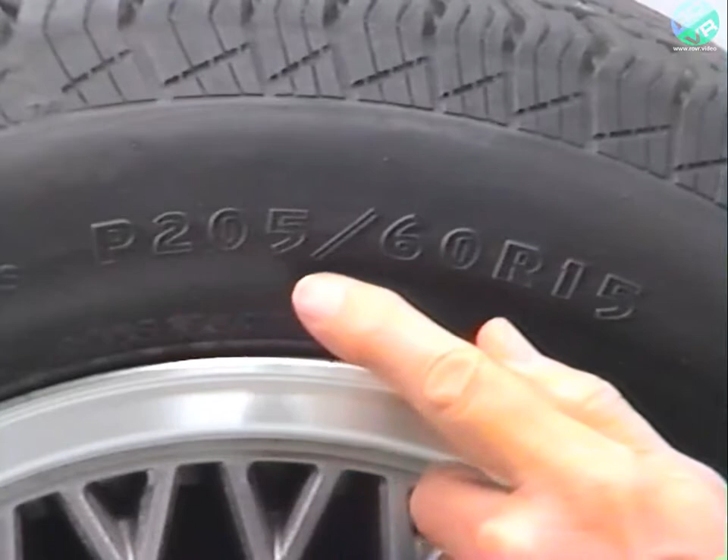In this program, we're going to cover the basic information you'll need to resolve customer complaints in these areas, including tire design, ratings, and required maintenance, and tire and wheel problem diagnosis and correction. Then we'll review the different types of suspension systems and the basic alignment angles and their effect on handling and steering. Finally, we'll examine procedures you need to be aware of when performing an alignment.

Let's begin with a look at some tire basics.

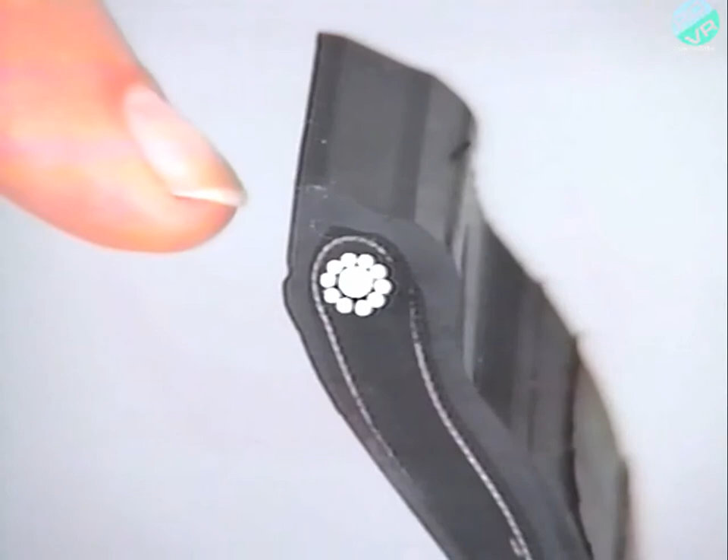Although their appearance and size may vary considerably from vehicle to vehicle, most tires are similar in the way they're put together. A bundle of wires called a bead provides strength where the tire meets the wheel. The body plies, consisting of tire cords and rubber, curve around one bead, across the tire, and around the other bead. Because this is a radial tire, the body plies are perpendicular to the direction of travel.

Between the body plies and tire tread are stabilizing belts, again consisting of tire cords and rubber. The belts help support the tire and keep the tread open for greater traction. The tire sidewalls and tire tread are made of a mixture of natural rubber and synthetic rubber. The tire parts are bonded to one another using heat and pressure in a process called vulcanizing.

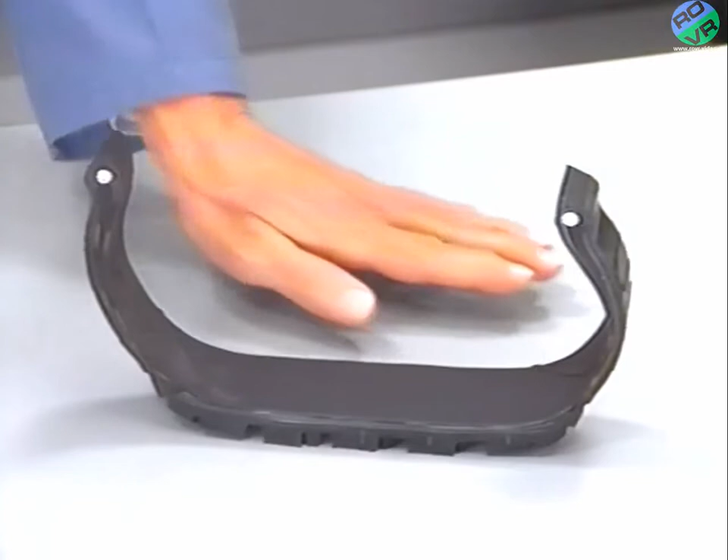Because of their superior performance, radial tires are used exclusively as original equipment on passenger vehicles. As mentioned earlier, on a radial tire, body plies run at a right angle to the direction of travel. This design results in less internal stress during turning and lower friction when rolling. This is why radial tires provide better fuel economy and greater steering sensitivity.

You can find out a lot more than the tire design by learning to read the sidewall of a tire. Let's start with the tire size. Most of the tires you'll encounter will have a metric size description. The metric classification is replacing the alphanumeric designation in which a letter provided load information.

Let's examine exactly what the metric size rating stands for on a P205/60R15 tire. The P at the beginning of the designation specifies the application, passenger car. The number following the application is the width of the tire cross-section in millimeters when the tire is mounted on a rim. The next number is the aspect ratio, the ratio of the tire's height to its width.

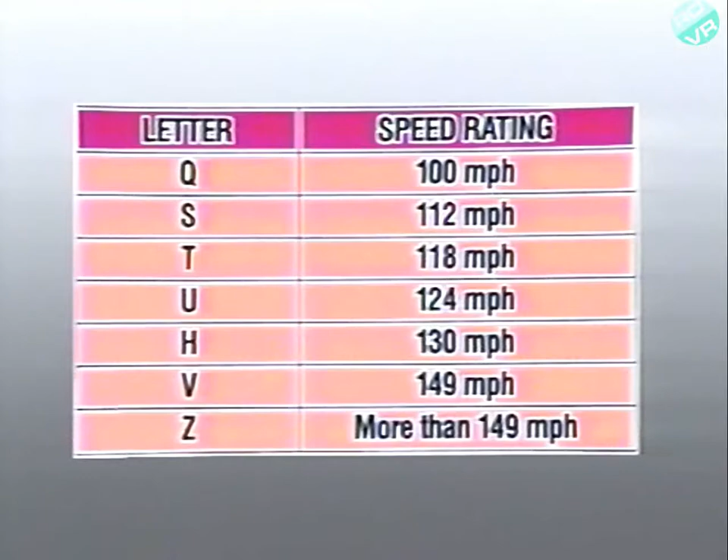An optional letter after the aspect ratio specifies the speed rating of the tire. The R indicates that the tire is a radial, and the 15 indicates the wheel size. An arrow on the sidewall of the tire indicates that the tire is unidirectional, designed to rotate in one direction.

When replacing tires on a vehicle, it's important to use the same size and type of tire as a replacement. Mixing radial and non-radial tires, for example, will affect handling and steering response. Changing tire sizes will alter the relationship between vehicle speed sensor signals and actual vehicle speed.

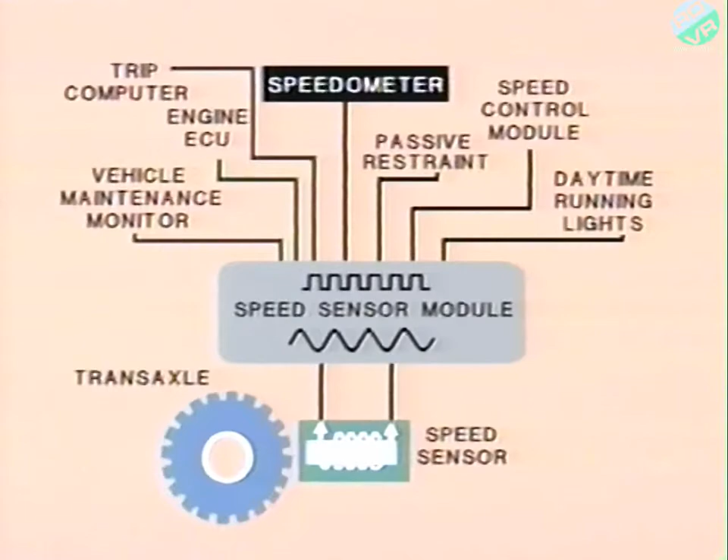Changing tire sizes can also affect the inputs to the controller for anti-lock brake operation. On four-wheel drive vehicles, changing tire sizes can result in damage to driveline components.

On the sidewall of a tire, you'll also find the uniform tire quality ratings for tread life, traction, and heat resistance. These ratings are required by the U.S. government to give consumers a way to compare tires.

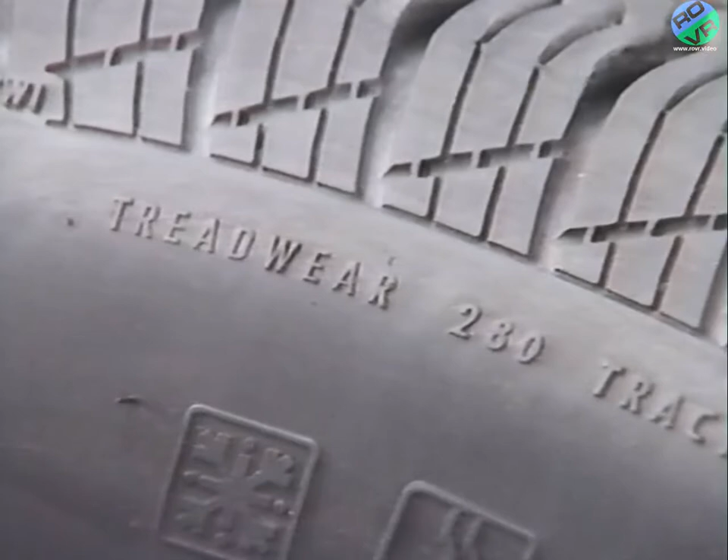Tread life rating is expressed as a percentage, representing the tire's amount of tread life in comparison to a reference value of 100. For example, the tread on a tire rated 280 could be expected to last 2.8 times longer than tread rated 100. The traction and heat resistance ratings are indicated by a letter grade, A, B, or C, with A being the highest.

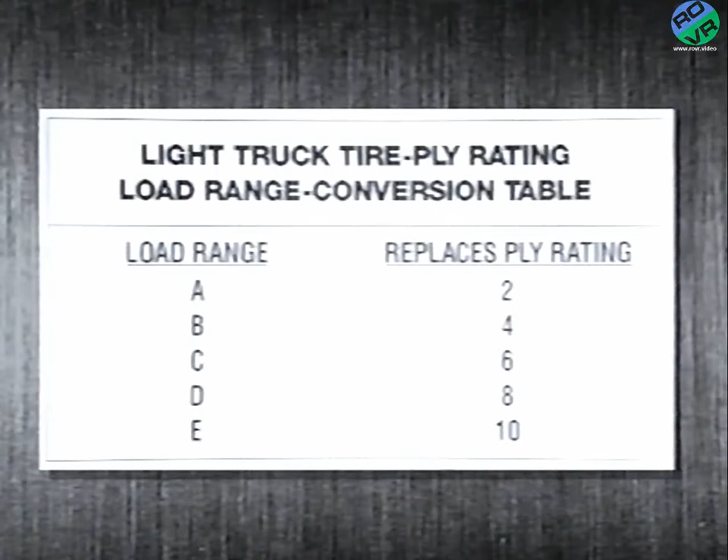Some tires may also have a letter designating the load range. This letter replaces the ply rating used previously. All-season tires have M and S in some combination to indicate that they are designed to operate in mud and snow.

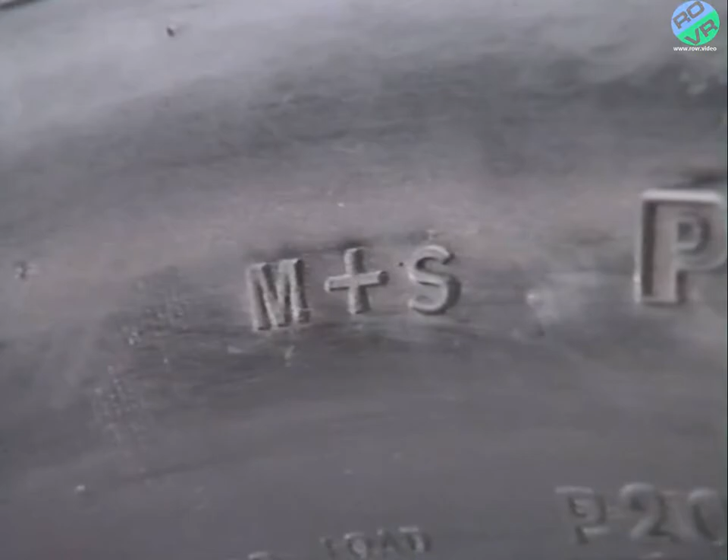Of vehicle components which require routine checking and maintenance, tires are one of the most likely to be ignored. Yet inflation pressure, for example, can have a dramatic effect on tire life, on the way a vehicle steers and handles, and on fuel economy.

Keep the following items in mind when checking inflation pressure. Do not bleed off air from a hot tire to bring inflation pressure to within specifications.

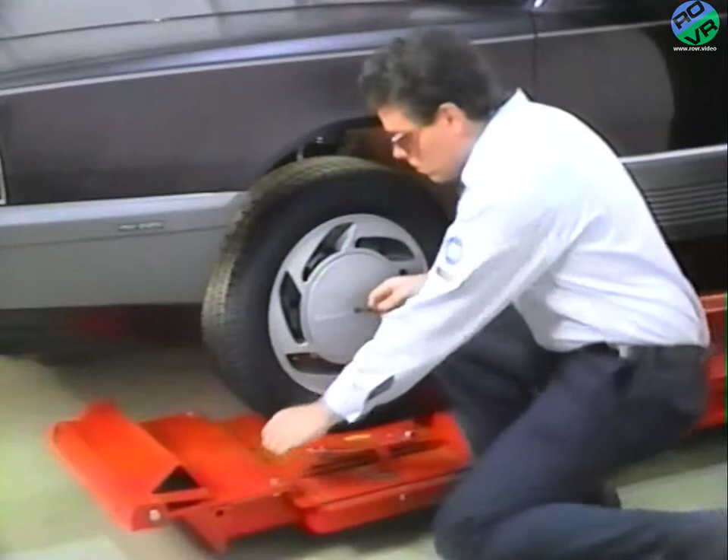A pressure reading on a hot tire is not accurate. Check inflation pressure with the tires cold. The vehicle should not have been driven for at least 3 hours. Finally, follow the recommendations on the tire inflation placard or in the owner's manual.

Keep in mind that inflation pressure recommendations do not apply to compact spare tires, and compact and lightweight spares are limited in both tread life and in the speed they can be driven.

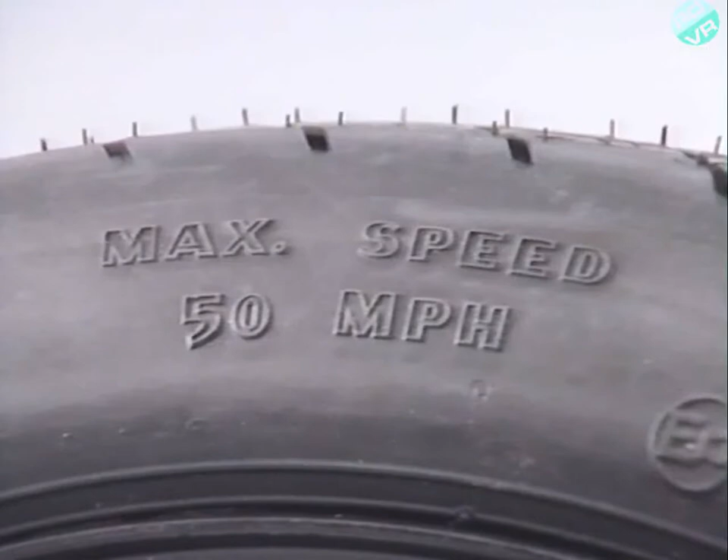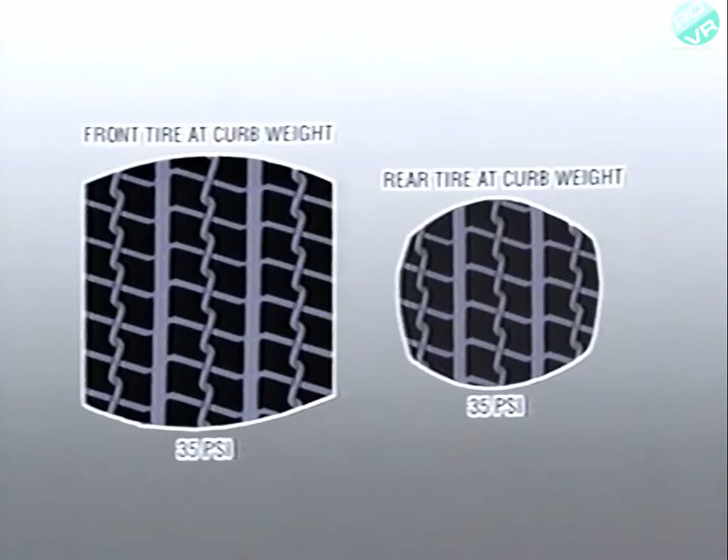Tire rotation is another aspect of tire service that is often ignored and an area surrounded by a great deal of confusion. Tire rotation can help equalize tread wear and greatly extend tire life. Rotation can be particularly important on front-wheel drive vehicles, because of the difference in the amount of tire-to-road contact between the front and rear of these vehicles, irregular wear can develop in rear tires which are not rotated.

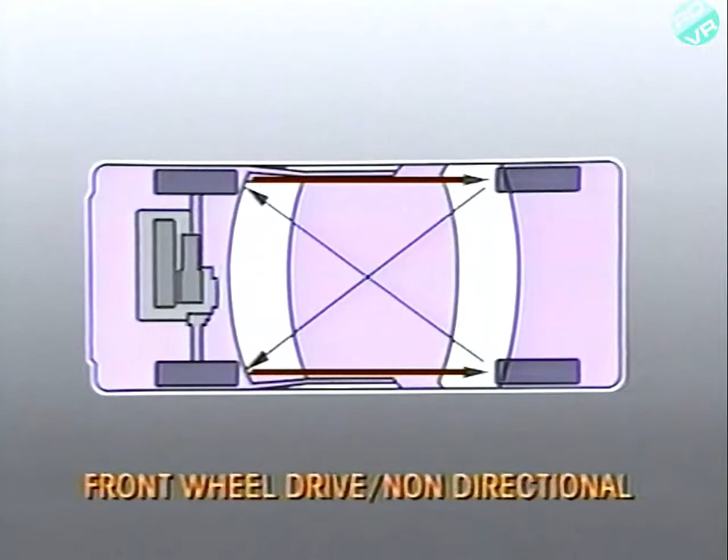The rotation pattern depends on whether a vehicle is front-wheel drive, rear-wheel drive, or four-wheel drive, and whether the vehicle uses unidirectional or non-directional tires. The basic patterns to keep in mind are the front cross for front-wheel drive vehicles with non-directional tires, the rear cross for rear-wheel drive vehicles with non-directional tires, and same side rotation for vehicles with unidirectional tires. Four-wheel drive vehicles with non-directional tires use a cross rotation pattern.

Now that we've gone over tire and wheel basics, next we'll look at some procedures to use for problems that could be tire or wheel related.

Because of the variety of symptoms and the wide range of possible causes, diagnosing a noise or vibration complaint can be difficult. It's important, therefore, to use a systematic approach that covers all the bases. Part of this approach is a thorough preliminary inspection.

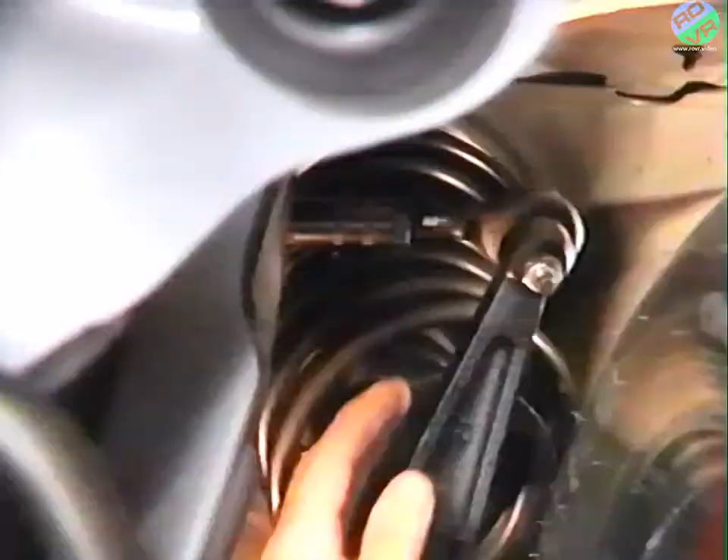Be sure to check drive shafts and yokes for incorrect angles and U-joints for wear or damage. Check for loose or worn steering or suspension components, a loose rack and pinion assembly, or loose wheel bearings, loose wheel nuts, or an improperly mounted wheel.

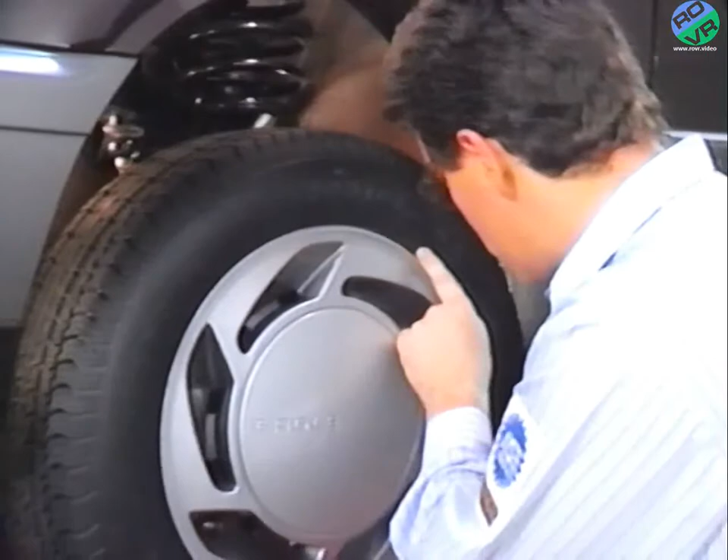When inspecting the wheel, look for damage or evidence of missing wheel weights. Always check the inside of wheels for dried mud or other foreign matter that may affect wheel balance. The tire bead should be properly seated on the rim, and tire inflation pressure should be within specifications.

Check tire tread for distortion and wear. Tires which are worn down to the tread wear indicator bars should be replaced, as should tires which are worn unevenly. When road testing a vehicle, try to isolate the cause of the vibration or noise according to the conditions under which it occurs.

For example, does the vibration occur in a particular range of vehicle or engine speed? Is the vibration torque sensitive? For example, could it be related to engine or transmission mounts? Does the noise disappear during neutral coast down? Is it driveline related? Does the noise or vibration increase or decrease during braking?

Does the noise or vibration occur only on turns? Is it CV joint or wheel bearing related?

For general noise and vibration diagnosis, it's a good idea to use a log sheet to record the results of the road test. Comparing your results to a diagnosis chart should give you a pretty good idea of where to concentrate your troubleshooting. If the noise or vibration was related to vehicle speed and was not affected by a neutral coast or turning or braking, there's a good possibility that it's wheel or tire related.

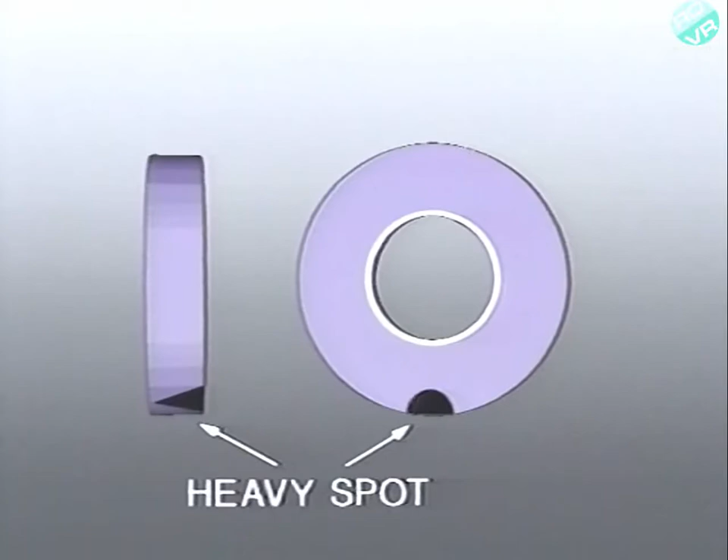When a disproportionate amount of weight is concentrated in a small area relative to the tire plane, the heavy spot exerts side-to-side force as the tire rotates. This is known as dynamic imbalance and results in side-to-side movement of the tire and wheel.

In addition to heavy spots, dimensional irregularities or runout can cause tire and wheel problems if it is excessive. Radial runout occurs when the tire and wheel assembly is not perfectly round. Lateral runout occurs when the tire and wheel assembly is not symmetrical from side to side.

Excessive radial and lateral runout can cause conditions similar to those caused by static and dynamic imbalance. Now let's look at some tire and wheel conditions which may result from imbalance or excessive runout.

Tire waddle is side-to-side motion that occurs at low speeds. A slight amount of waddle may be normal in a radial tire, but excessive waddle may be the result of lateral runout.

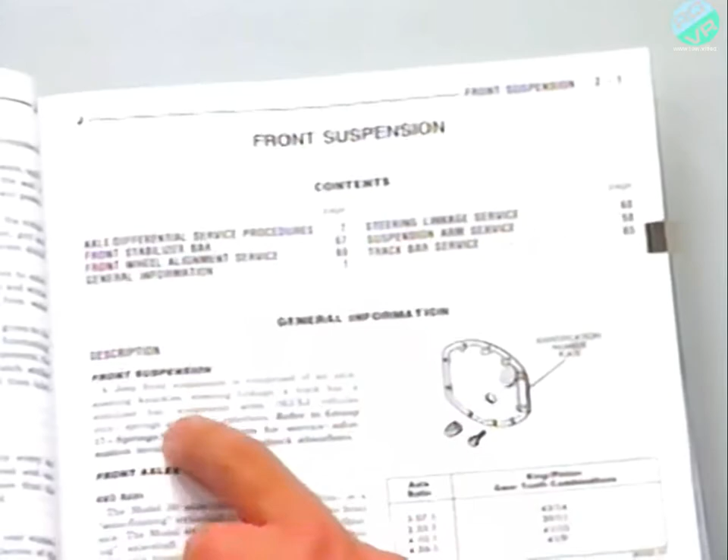Shimmy can also be caused by loose wheel bearings or by worn or loose steering components. For a detailed procedure for tracking down the cause of wheel shimmy on Jeep vehicles, see the front suspension section of the Jeep engine, chassis, and body service manual.

When you believe a noise or vibration is tire and wheel related, the first step is to check tire and wheel assembly radial and lateral runout on the vehicle.

You can determine radial runout by setting the dial indicator to 0 on the lowest part of the tire and then rotating the tire. Record the highest reading. For lateral runout, zero the dial indicator on the lowest spot on the tire's sidewall as close to the tread as possible. Then rotate the tire to find the maximum reading.

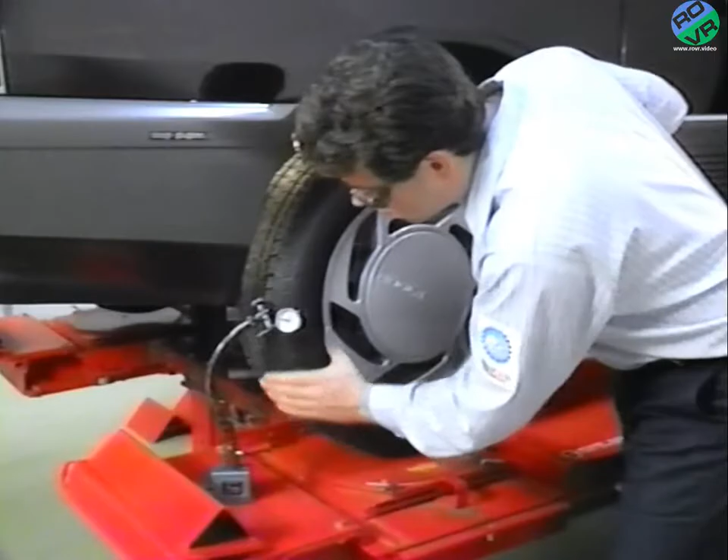When an on-vehicle check shows that excessive runout is the cause of vibration, you can continue diagnosis by checking radial and lateral runout off the vehicle. This will tell you whether the problem is in the wheel and tire assembly or the hub assembly.

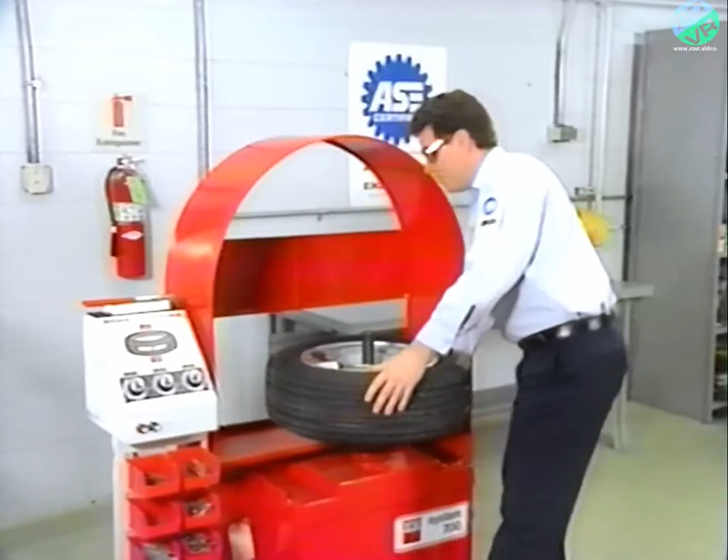After marking the wheel location relative to the wheel studs, remove the wheel and tire from the vehicle and install the assembly on a properly calibrated wheel balance machine. Determine radial or lateral runout as described earlier and mark the spot on the tire. Also make a corresponding mark on the wheel.

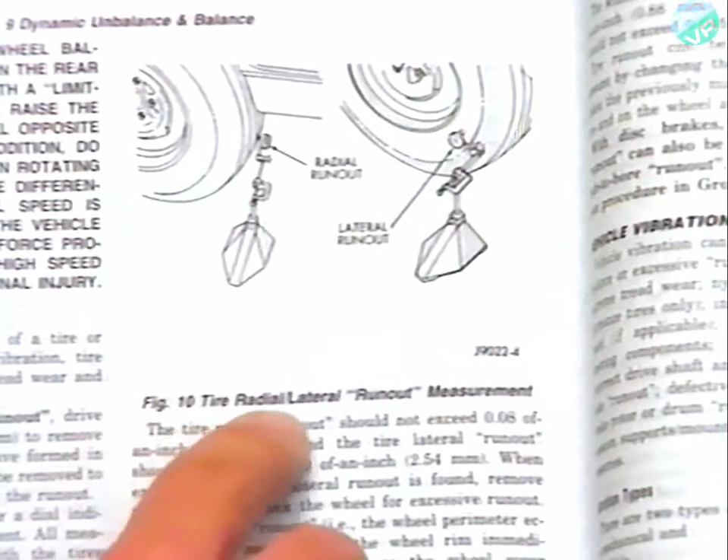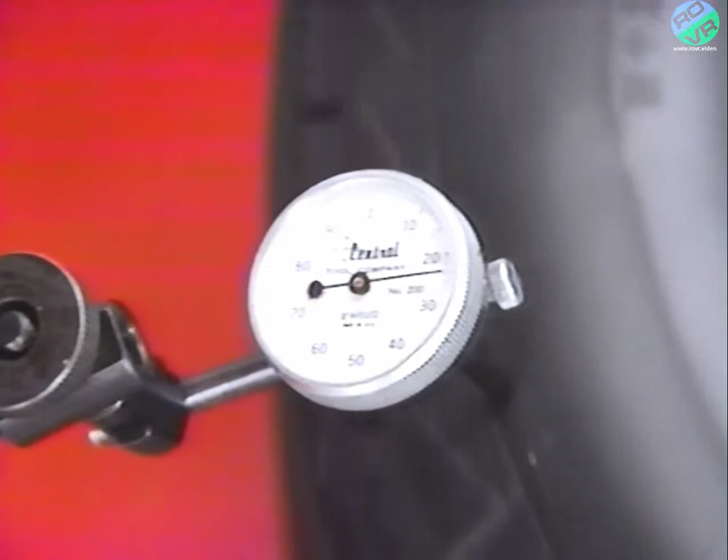To see if radial or lateral runout is excessive, compare the readings to the specifications in the service manual. If the runout is within specifications, the problem is in the hub assembly, and you'll need to check runout on these components. But if the runout is excessive, you can use a tire-to-wheel match mounting procedure to reduce runout.

This procedure is explained in Technical Service Bulletin 220189. After marking the location of the tire relative to the valve stem, break the tire loose and rotate it 180 degrees on the wheel.

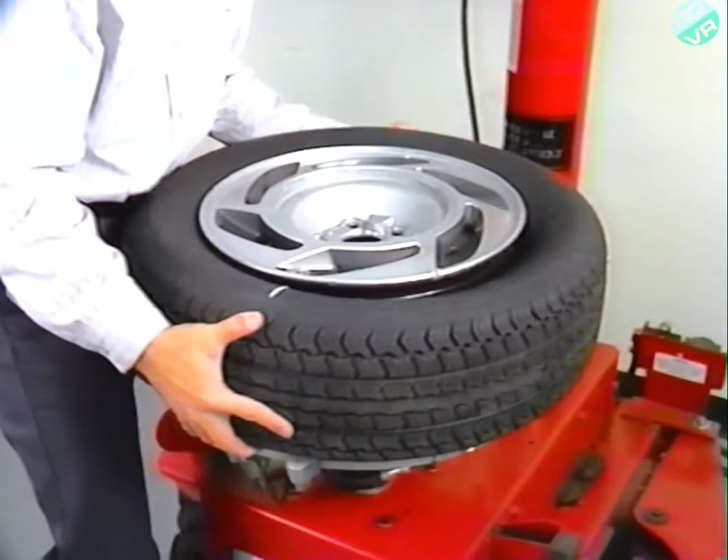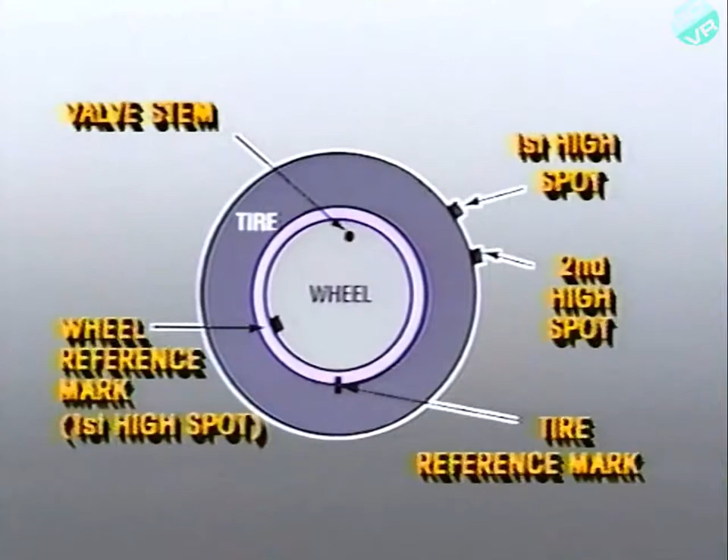Then recheck runout. If runout still exceeds specifications, mark the high spot on the tire. If the new high spot is within 4 inches of the original high spot, the mark on the tire, the tire is at fault and should be replaced.

If the new high spot is within 4 inches of the original high spot, the mark on the wheel, you'll need to check the wheel for excessive runout.

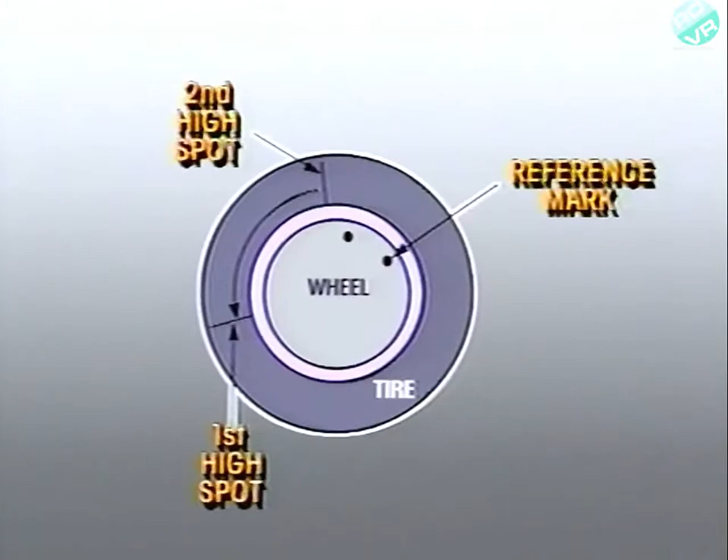If the new high spot is not within 4 inches of the original high spot mark on the tire or the wheel, draw an arrow from the second high spot to the first high spot in the direction of the shortest distance. Rotate the tire 90 degrees on the wheel in the same direction as the arrow. This will normally bring runout within specifications.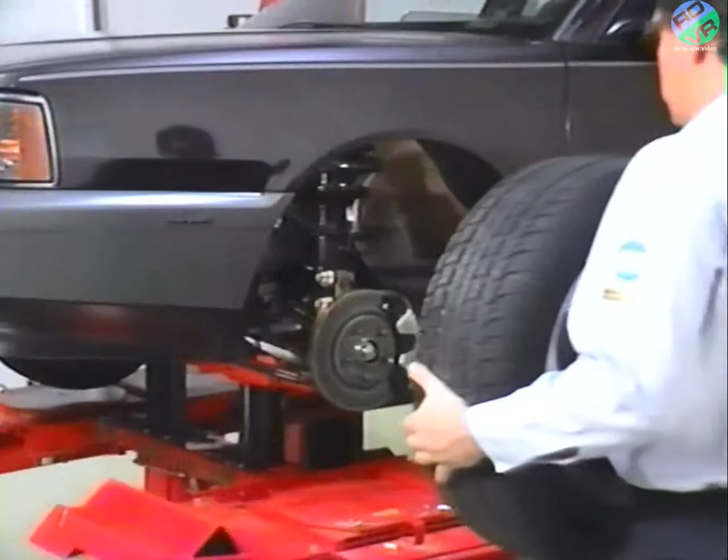When reinstalling the tire and wheel on the vehicle, be sure to use the reference marks on the wheel and wheel stud to return the wheel to its original position on the vehicle. If the vibration persists during the road test, you may need to rotate the tire and wheel on the hub to minimize runout from the hub assembly.

The next step in eliminating vehicle speed-sensitive vibration is to perform an off-the-car dynamic balance of wheel and tire assemblies. Later model dynamic balance machines do everything but put the weights on for you. But there are a few items to keep in mind during dynamic balancing.

Always mark the position of the wheel relative to the wheel studs so the assemblies can be reinstalled in the same position. Check the wheel balancer calibration at least once every 2 weeks. Always place the back of the wheel against the proper size cone. This ensures an accurate mounting.

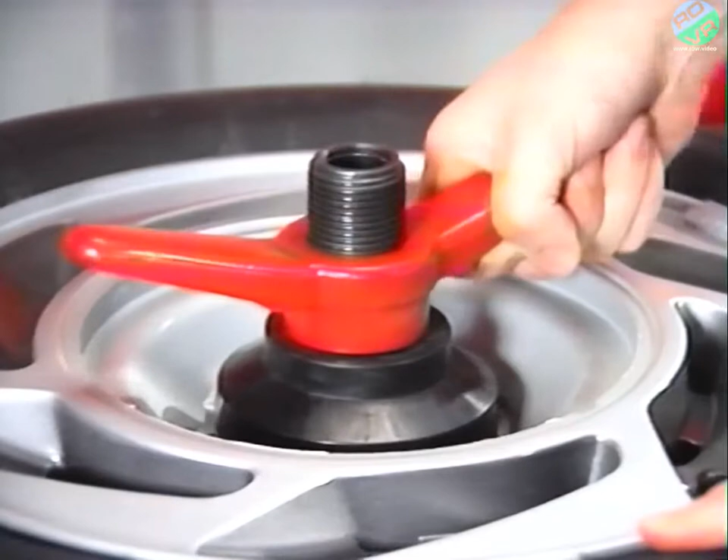Tighten the wing nuts securely against the wheel. Otherwise, the machine's weight location indication may be incorrect. If you have to add more than 3 ounces of weight to any location, you may have to rotate the tire on the wheel to reduce the amount of weight needed.

After adding weight, always re-spin the tire and wheel assembly to make sure the weights are correct, and road test the vehicle to check for vibration.

If off-car balancing failed to remedy the condition, you'll need to use an on-car balancer to correct for imbalance in the hub, rotor, drum, or wheel cover. If you do perform an on-car balance, be sure to inform the customer that the tires and wheels must be rebalanced if they're moved from their location on the vehicle.

Besides noise and vibration, occasionally tire irregularities can cause a tire lead or pull condition. When a vehicle pulls to one side, tire lead should be eliminated as a cause prior to alignment procedures. The reference book accompanying this program contains a chart for diagnosing and correcting tire lead.

Now that we've covered tires and wheels, let's move on to suspension, starting with a look at the types of suspensions you're likely to encounter.

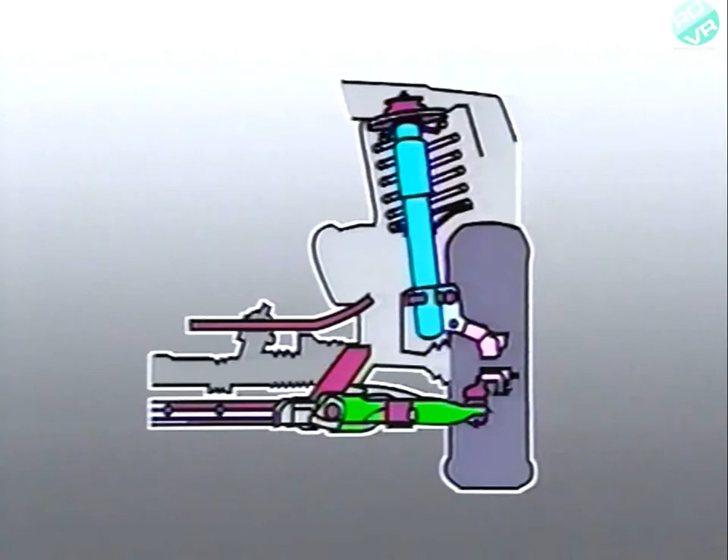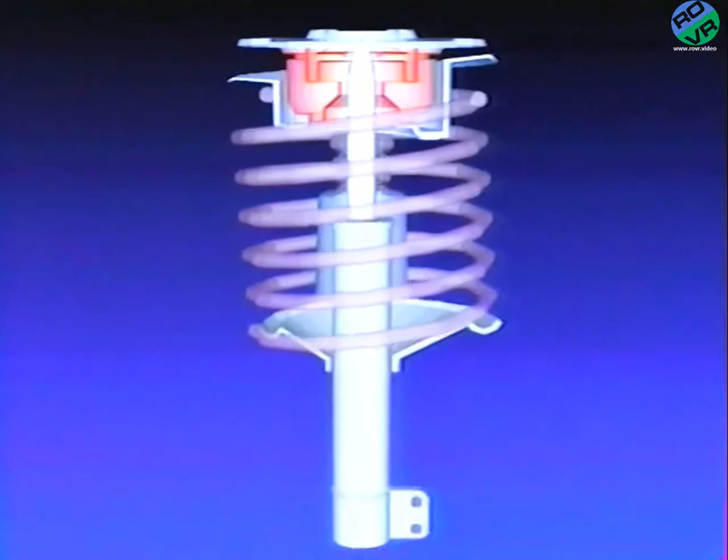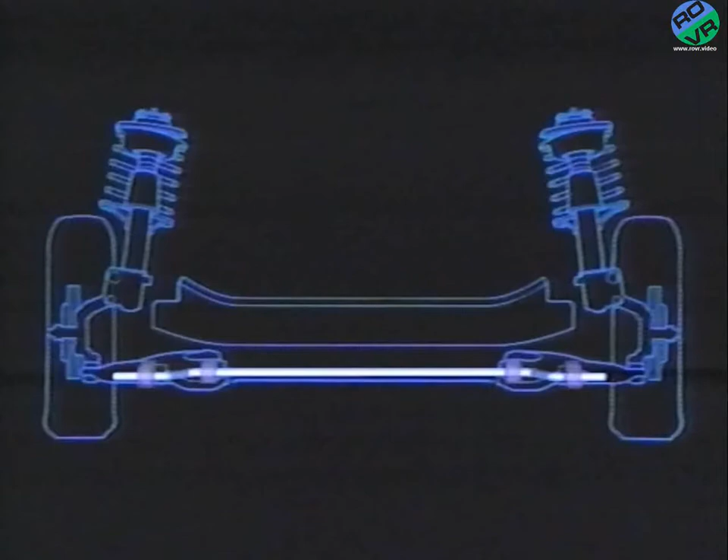The strut coil springs hold the vehicle at its ride height as the tires move over irregularities in the road. The strut shock absorbers dampen spring movement. A stabilizer bar transfers some of the load from one side of the vehicle to the other to minimize body sway. Other front suspension designs use coil springs and separate shock absorbers.

Jeep MJ and XJ models use a coil spring between the body and axle along with locating arms. This design, known as Quadralink, also uses a track bar to control lateral motion and a stabilizer bar to control body sway. Shock absorbers dampen spring motion.

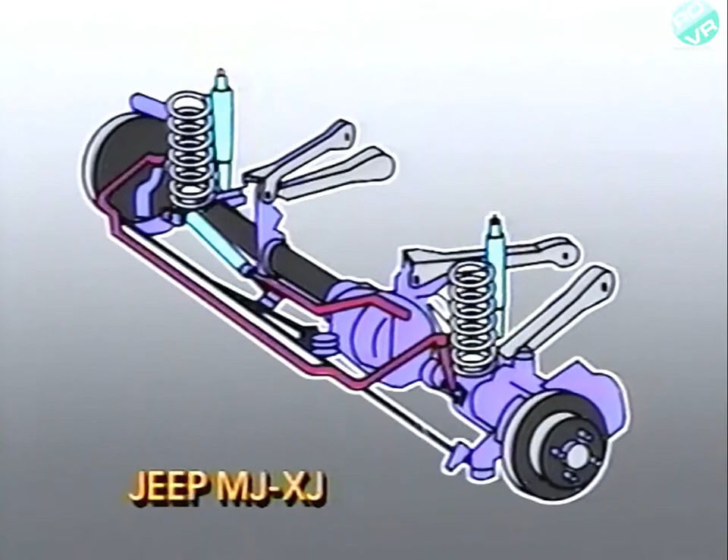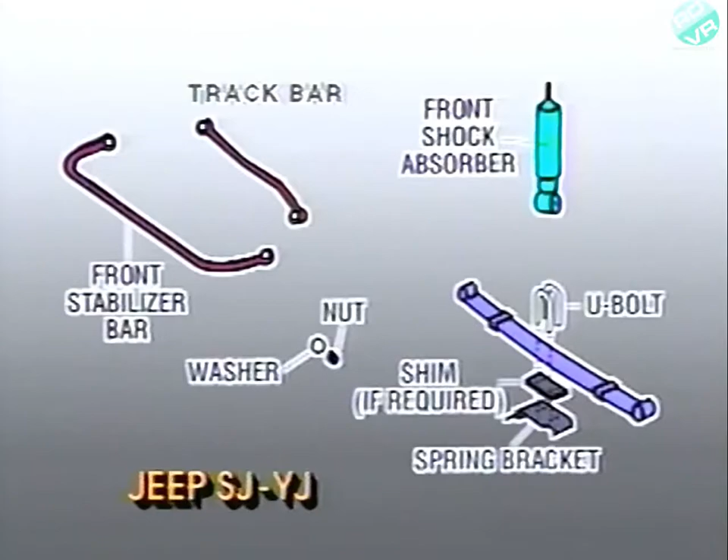Some four-wheel drive vehicles use leaf springs on the front axle. Jeep SJ and YJ models use front multi-leaf springs mounted at the front and rear to the vehicle frame. A track bar controls lateral suspension movement, while a stabilizer bar controls body sway.

Rear suspensions use a number of different designs to control ride. The most common on passenger cars is the trailing arm type, with coil springs, torsion bars, or struts.

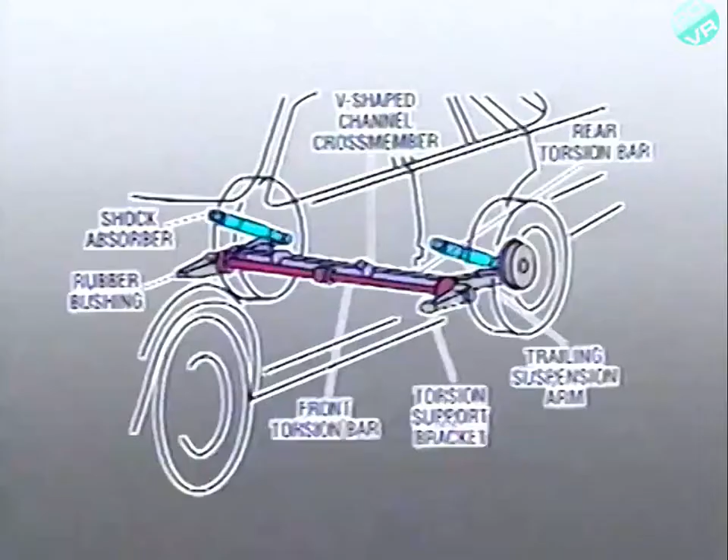Premier uses a trailing arm suspension, but instead of coil springs, 2 interconnected torsion bars run between the trailing arms and are attached to the chassis through support brackets. The torsion bar assembly also functions as a stabilizer bar to control body sway. Gas-charged shock absorbers dampen suspension movement.

The Summit and Talon use struts instead of coil springs between the trailing arms and chassis. A torsion bar between the rear wheels reduces body sway during cornering, and a lateral rod controls side-to-side suspension movement.

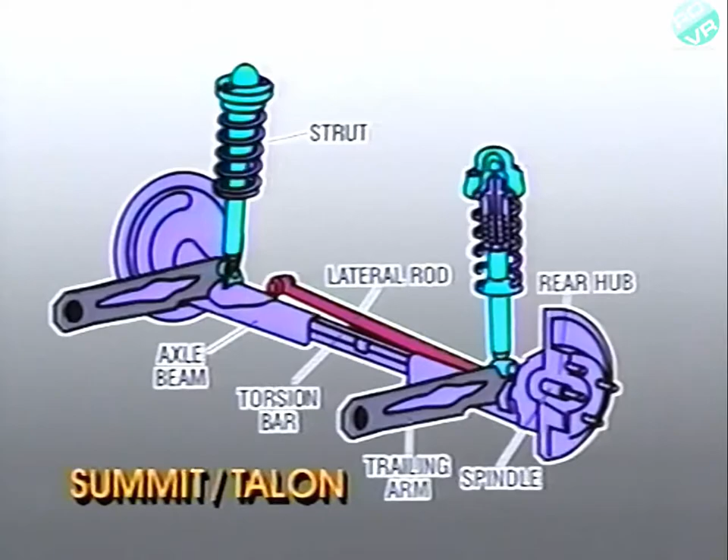The rear suspension of the all-wheel drive Eagle Talon uses a double wishbone design. This design includes struts between the trailing arms and chassis and control arms between the differential and trailing arm. A stabilizer bar is attached to the trailing arm to reduce body sway.

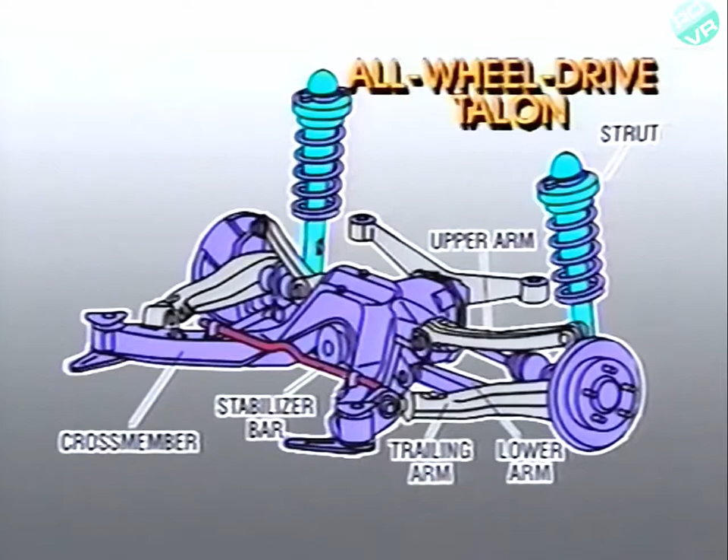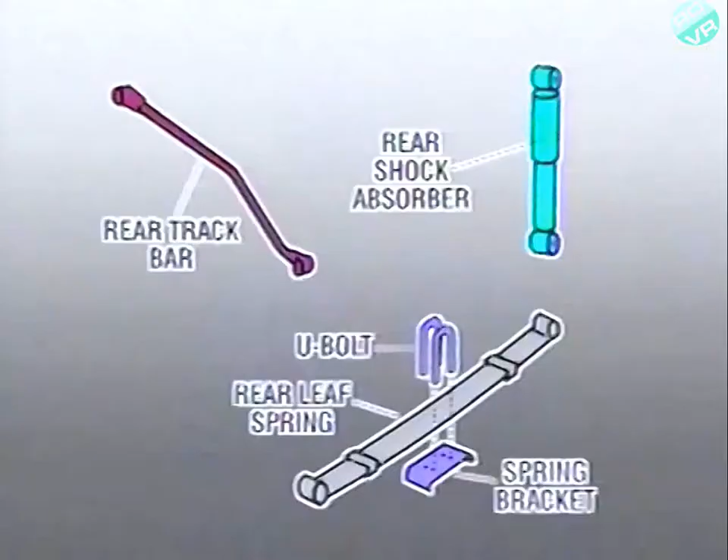Instead of coils or struts on trailing arms, some vehicles use leaf springs attached to the chassis for their rear suspensions. Jeep SJ and YJ models use leaf springs with a track bar to control lateral movement and shock absorbers to dampen spring motion. MJ rear suspension also uses leaf springs and shock absorbers, while XJ models add a stabilizer bar to control body sway.

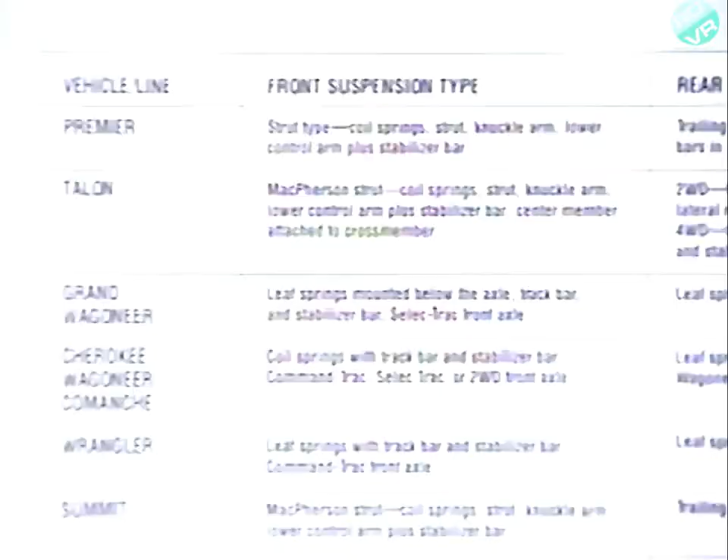The reference book accompanying this program contains a chart listing the different types of front and rear suspensions according to model. No matter what type of suspension a vehicle is equipped with, suspension service involves a check of the orientation of the tires and wheels with respect to the rest of the vehicle. Alignment angles are the subject of the next part of this program.

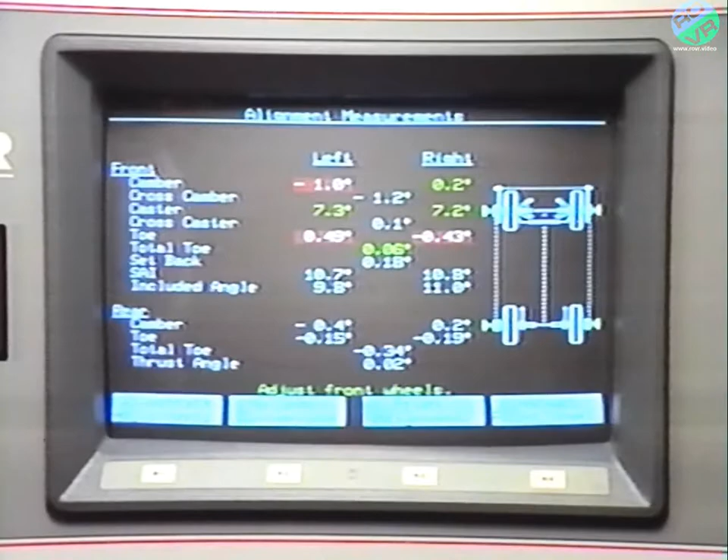The purpose of alignment angles in suspension design is to allow the tires to track straight when the vehicle is in motion, to provide optimum high and low speed handling and steering response, and to minimize body sway during cornering and tire wear. An understanding of the adjustable and non-adjustable alignment angles, including their effect on handling and tire wear, is crucial in suspension service.

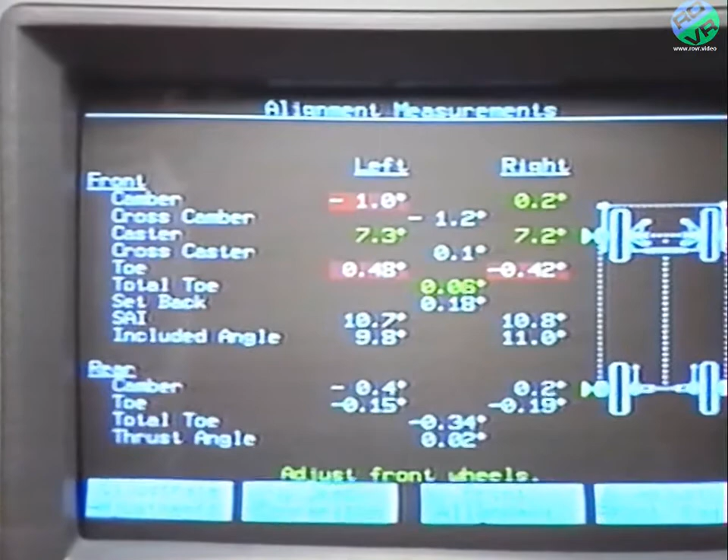Angles which are non-adjustable can still provide an indication whether a suspension component is worn or damaged. Let's begin our discussion with camber, caster, and toe, 3 alignment angles which are adjustable on many vehicles. Camber is simply the inward or outward tilt of the wheel and tire relative to the chassis.

When the tilt at the top is inward, camber is negative. Outward, camber is positive. The amount of tilt is measured in degrees. You may be wondering why tires and wheels aren't simply fixed at 0 degrees camber.

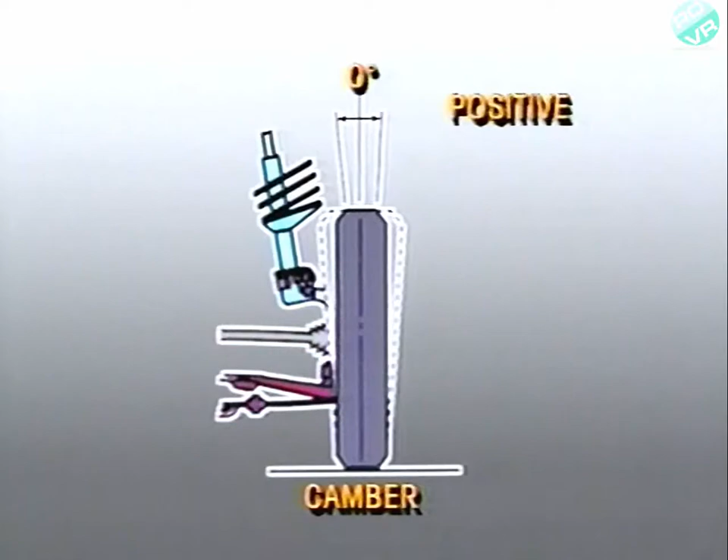The fact is that while camber is adjusted with the vehicle at rest and unloaded, camber changes when the vehicle is loaded and in motion. So a slightly positive camber setting will change to 0 degrees camber when the vehicle is driven.

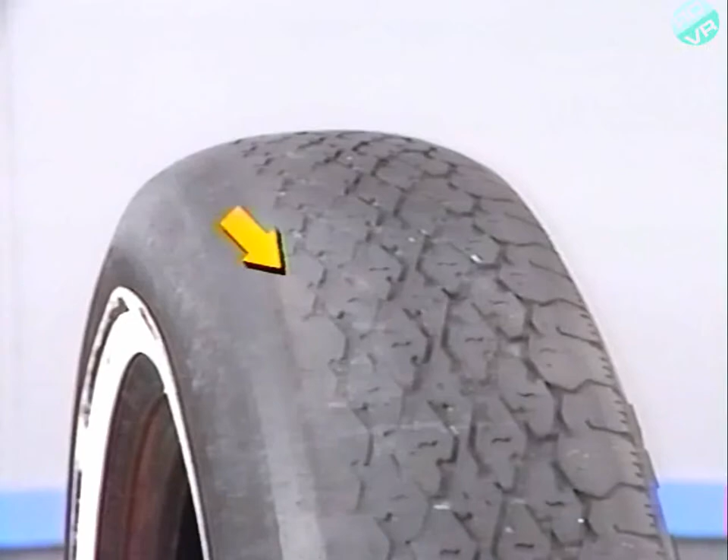When camber is not within specifications, tires can wear unevenly. Excessive positive camber can cause accelerated wear on the outside edge of tires. Excessive negative camber can cause accelerated wear on the inside edge of tires. Camber that is not within specifications will also cause a pull in the direction of the wheel and tire with the most positive camber.

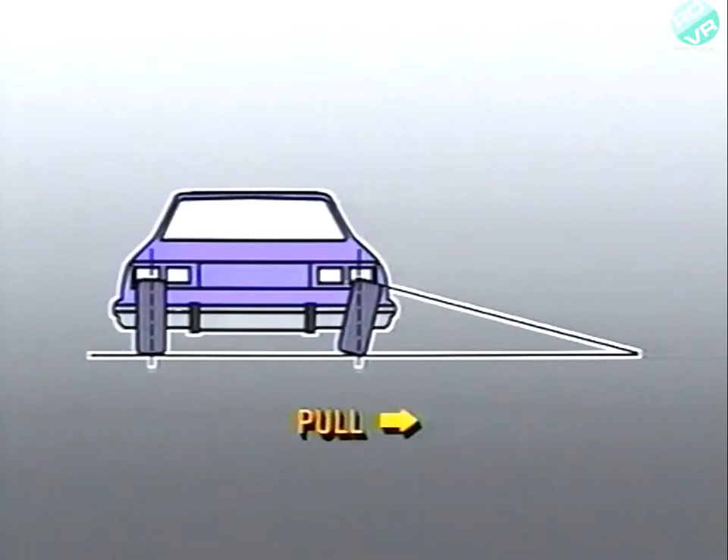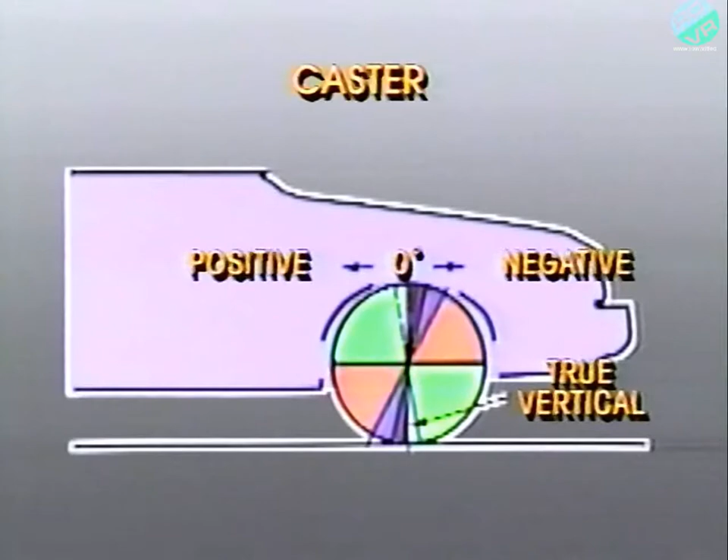Caster is the tilt of the steering axis toward the front or rear of the vehicle. On a MacPherson strut suspension, the steering axis is a line drawn through the strut upper mounting and control arm ball joint. Caster is positive if the axis is inclined to the rear and negative if the axis is inclined forward. Like camber, caster is measured in degrees.

If caster is not equal, a vehicle will tend to pull in the direction of the side with the least positive caster. But caster that is out of specifications does not accelerate tire wear.

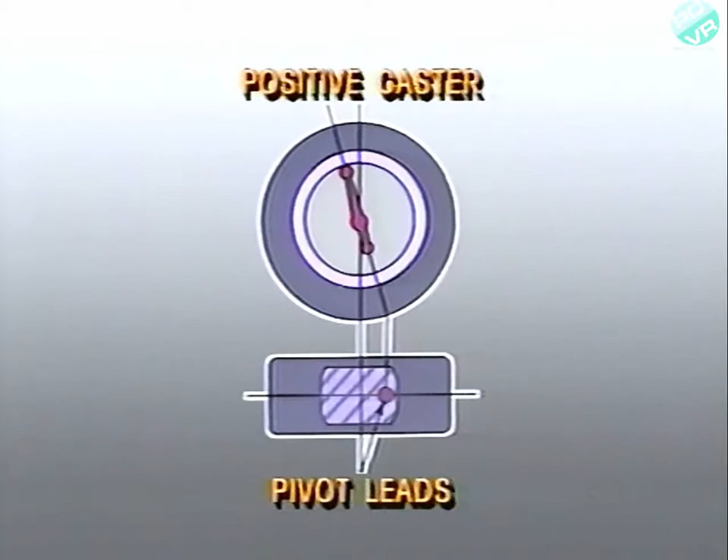Caster has a number of important effects on steering, handling, and tracking. Positive caster causes the steering axis to lead or pull the tire and wheel down the road. As a result, positive caster resists changes in direction and aids in directional stability.

At the same time, positive caster increases the amount of steering effort, but this can be offset by steering axis inclination, as we shall see.

Negative caster can aid in directional stability, but in a different way. A tire and wheel with negative caster will tend to steer into side forces such as those caused by wind.

On turns, positive caster increases negative camber on the outside wheel and positive camber on the inside wheel. This counteracts body sway and improves handling.

One other effect of positive caster is that it increases the wheel's tendency to toe in when the vehicle is moving. Negative caster increases the tendency to toe out.

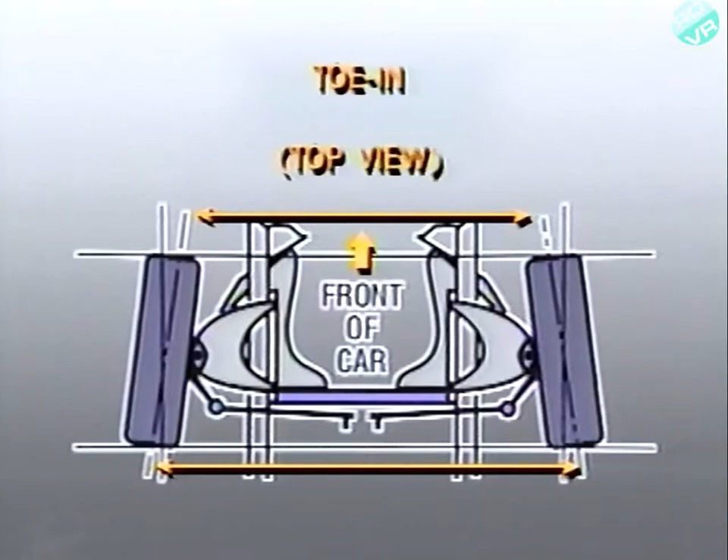Our next alignment angle, toe, is simply the difference in the distance between the front and rear of a set of tires. When the front edges of the tires are closer together, the tires are toed in, also referred to as positive toe. When the rear edges are closer, the tires are toed out, also referred to as negative toe.

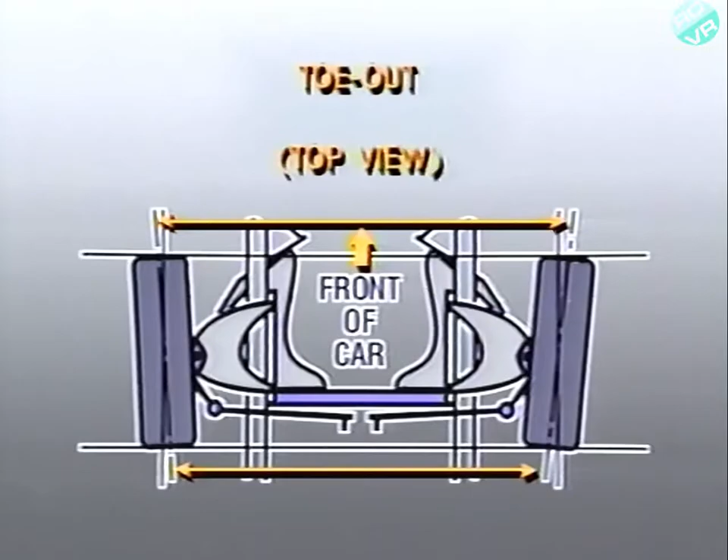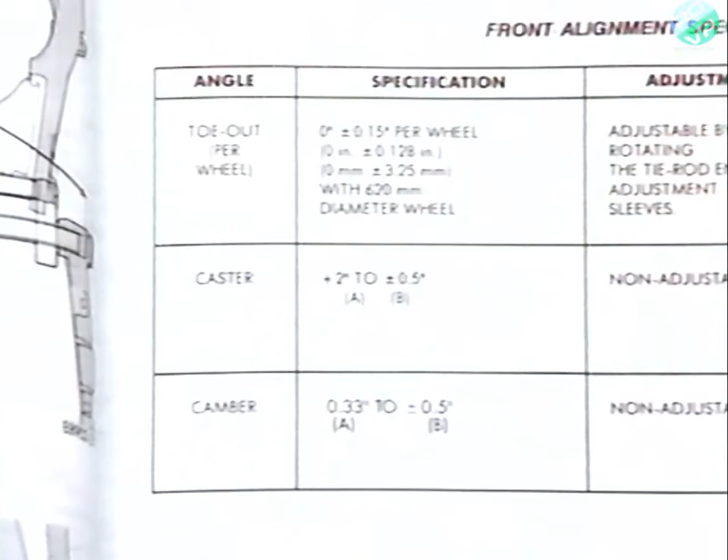Toe can be specified in inches or degrees. As with camber, toe is often set in or out to compensate for toe-in or toe-out tendencies when a vehicle is moving. A slight amount of toe-in is usually preferred on front tires.

Of all the alignment angles, toe has the greatest effect on tire wear. On radial tires, excessive toe can produce irregular wear, especially on tire edges. Incorrect toe can also cause a vehicle to wander.

When a vehicle makes a turn, the toe angle necessary to prevent tire scrub is different from that in the straight ahead position. This difference is called toe out on turns. Toe out on turns is necessary because the inside and outside wheels in a turn follow a different arc.

To prevent scrub, the center line of both front wheels must meet at the center line of the rear axle. Toe out on turns is provided by the changes in geometry of the steering arms during a turn.

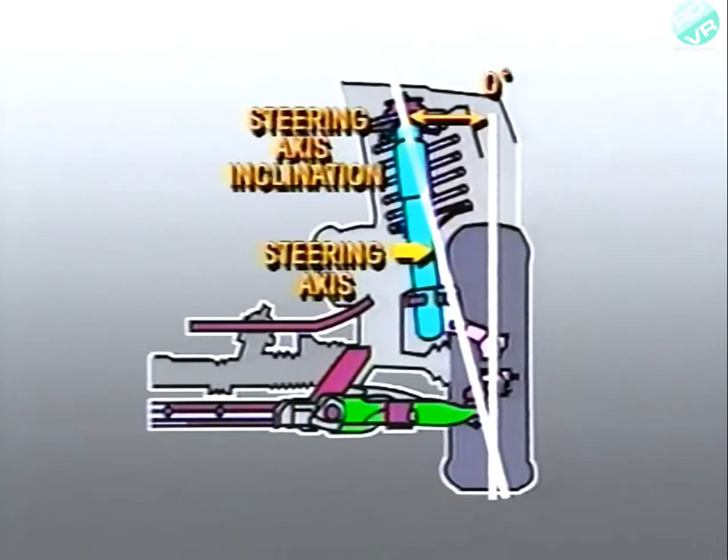Steering axis inclination is the inward tilt of the steering axis from true vertical as viewed from the front of the vehicle. As mentioned earlier, the steering axis on a strut suspension is a line drawn from the upper mount through the ball joint on the lower control arm.

Steering axis inclination tends to push the tire and wheel down on turns, raising vehicle height. Because the vehicle weight tends to return the tires and wheels to the straight-ahead position, steering axis inclination assists steering wheel return to the center position.

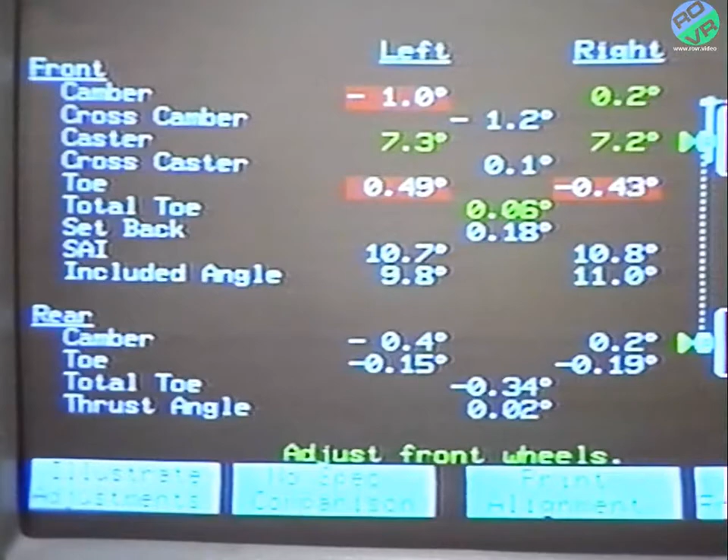Steering axis inclination can be measured, but it is not adjustable.

We've been looking at alignment angles with an emphasis on the front suspension, but some of the angles we've described apply to the rear wheels as well. To prevent excessive tire wear and for proper tracking and handling, all four wheels must be aligned properly.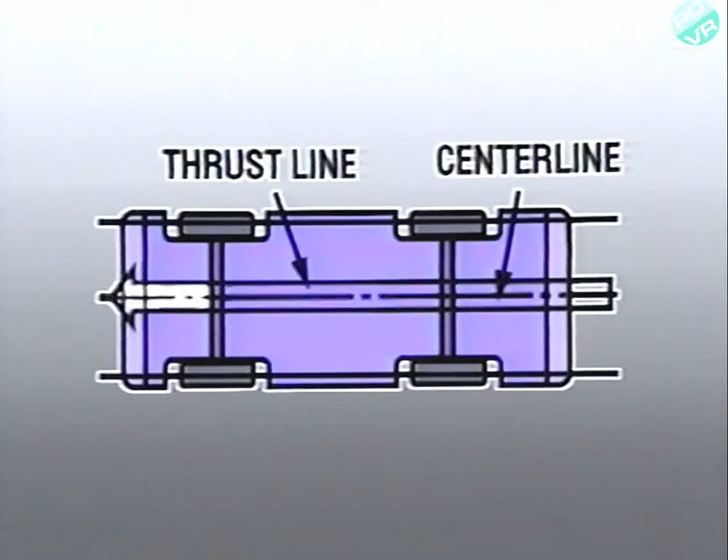When a vehicle is properly aligned, the direction or thrust line of the rear axle should coincide with the direction or thrust line of the front axle.

Both of these lines should be parallel to the vehicle center line. However, if one of the rear wheels or the axle is angled away from the vehicle center line, there is a lead in the direction opposite the thrust angle. The steering wheel must be held off-center and the vehicle dog tracks.

If toe is incorrect, tire wear may result. Because of all the factors affecting wheel alignment, you can see why a thorough, systematic approach is necessary. The procedures you'll need to use in this approach are the subject of the next part of this program.

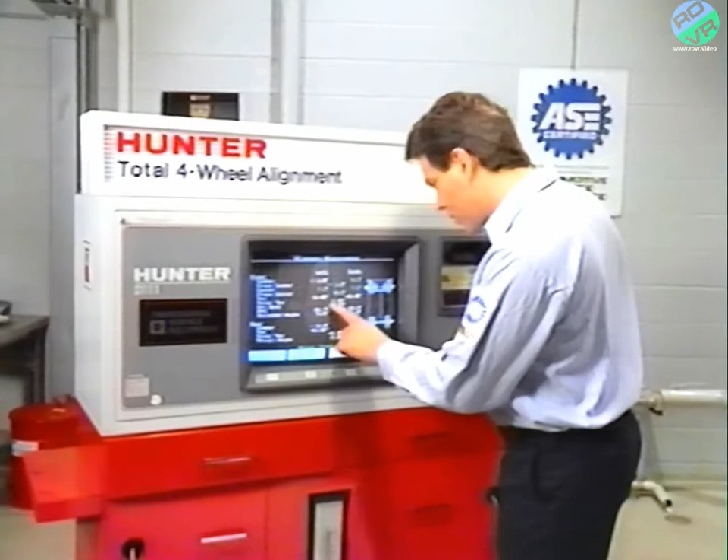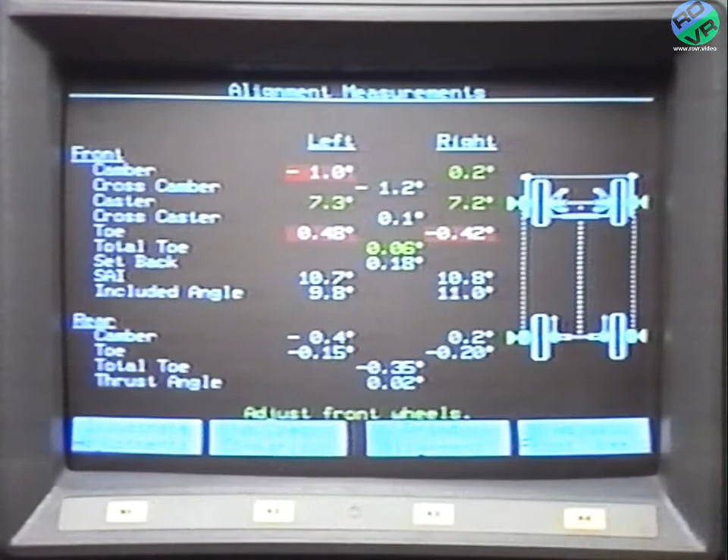With modern alignment equipment, it's easy to simply check adjustable angles, make the necessary adjustments, and send the customer on his way. But if this is all you do during wheel alignment, you may be setting yourself up for a comeback. Any alignment should include a thorough preliminary inspection and a road test. It also means checking all measurable angles, not just the adjustable ones. To see why these procedures are important, we need to look at them in greater detail.

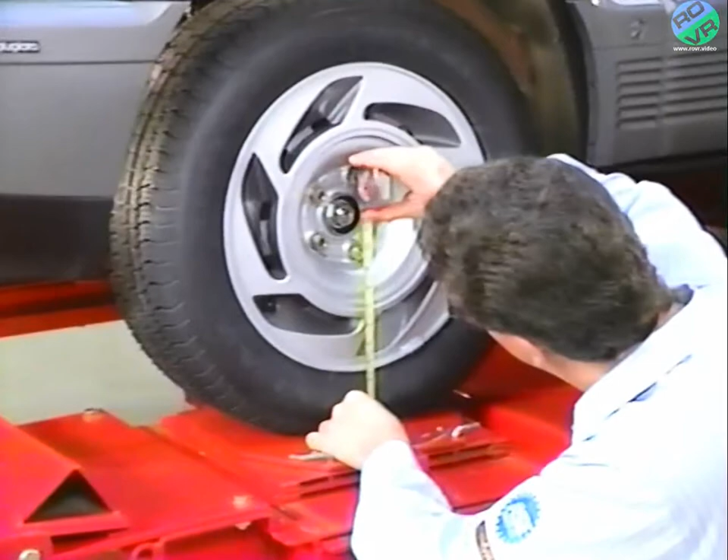A thorough preliminary inspection includes checking the ride height of the vehicle. Ride height has an effect on camber and caster. In fact, a difference of as little as 1 inch from side to side may cause a pull. Because wheel and axle offset affect steering and handling, it's also important to check wheelbase.

Checking for loose, worn, or damaged components is another essential part of a preliminary inspection. The check should include steering linkage and steering gear or rack mounting, ball joints, control arm bushings, spring shackles, stabilizer bushings, strut mounting, and strut bearing.

Inspecting tires and checking out any problems indicated by tire wear is also an essential part of alignment. Don't overlook tire inflation pressure in your inspection. Incorrect pressure can cause tire wear, wander, or pull problems.

When road testing the vehicle, use a flat, smooth road to avoid any lead caused by road crown and noises caused by the pavement. Differentiate between wander and lead.

Causes of wander include incorrect tire pressure, incorrect toe or caster, loose steering components or wheel bearings, worn control arm bushings, excessive friction in steering components, and a misaligned rear axle.

Causes of lead include unequal tire pressure, incorrect camber or caster, mismatched tires, a dragging brake, or a misaligned rear axle. As mentioned earlier, a lead can result from tire irregularities.

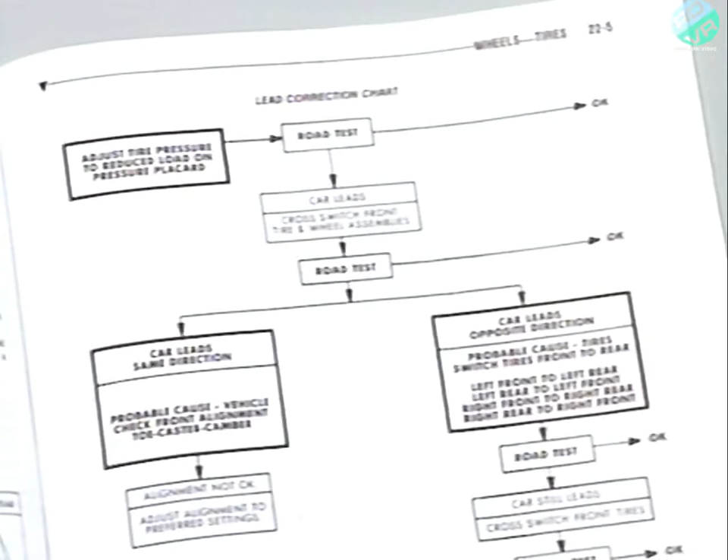If alignment angles are within specs, be sure to use the tire lead correction chart in investigating tire lead as a possible cause. If vibration or noise was the only symptom on the road test, it's not likely that wheel alignment is the cause, and you should concentrate on wheels and tires.

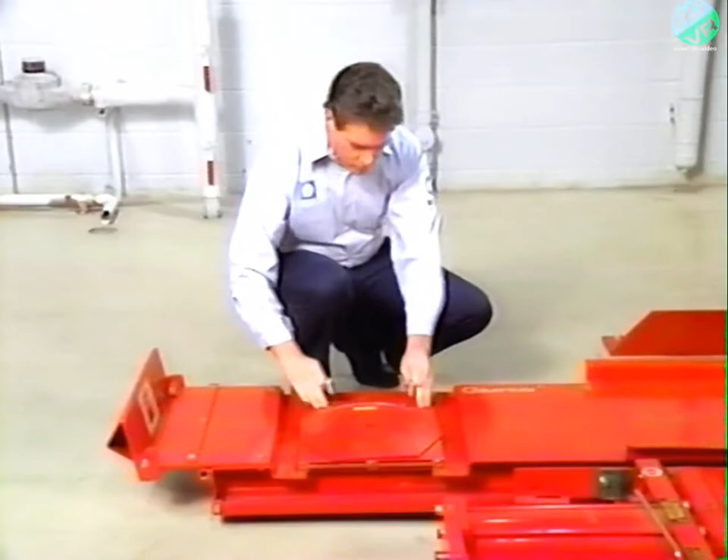Before placing a vehicle on the alignment rack, be sure to check the turn plates for free operation. Check the vehicle interior and trunk for weight, which might affect alignment readings. Jounce the vehicle front and rear to establish ride height. When checking angles and making adjustments, keep the following items in mind.

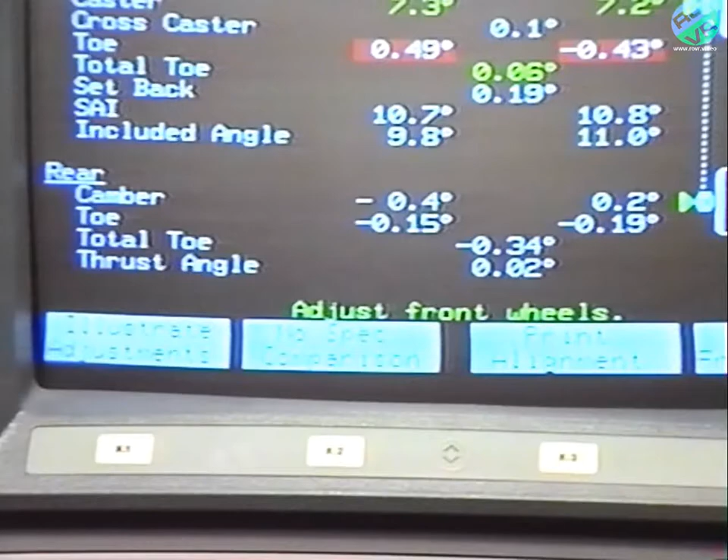For a four-wheel alignment, check and adjust rear wheels first. You can adjust rear camber and toe on all domestic front-wheel drive vehicles by using shims under the spindles. If you're doing a four-wheel alignment by backing a vehicle onto a two-wheel rack, keep in mind that toe will be reversed. Toe out will read as toe in and vice versa.

When performing front-wheel alignment, be sure to check both adjustable and non-adjustable angles. By looking at settings, you can often identify a damaged component.

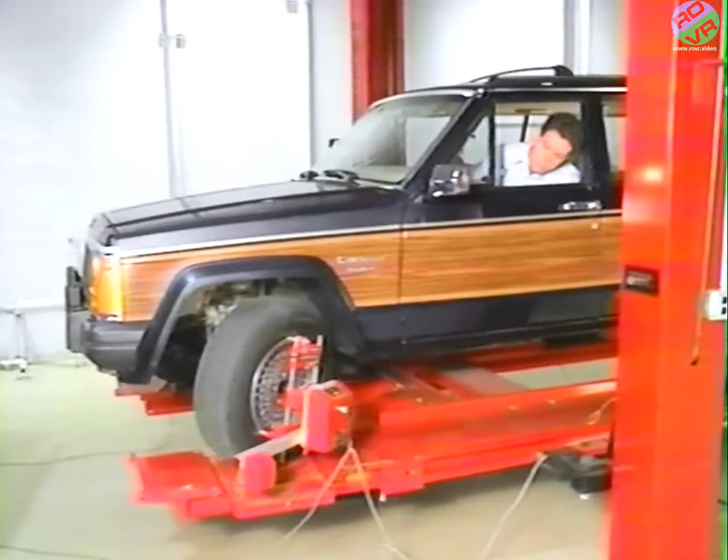Jeep vehicles may require alignment procedures which are different from the ones you're used to seeing on other vehicles. On MJ and XJ vehicles, to adjust toe, first center the steering wheel by counting the total number of stop-to-stop turns, then turning the wheel half that number from one of the stops.

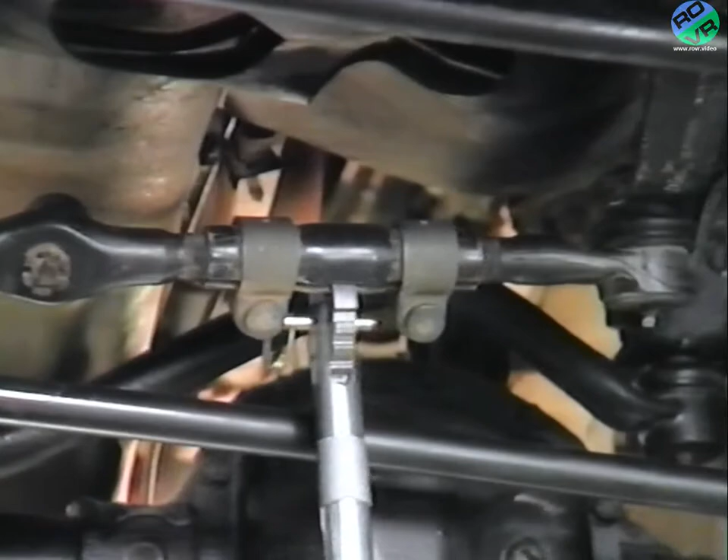Then adjust right wheel toe to 0 using the drag link adjustment sleeve. Next, adjust left wheel toe by turning the tie rod. After adjusting toe, always position the tie rod or drag link adjustment bolts so that the bolt ends face rearward and are angled upward.

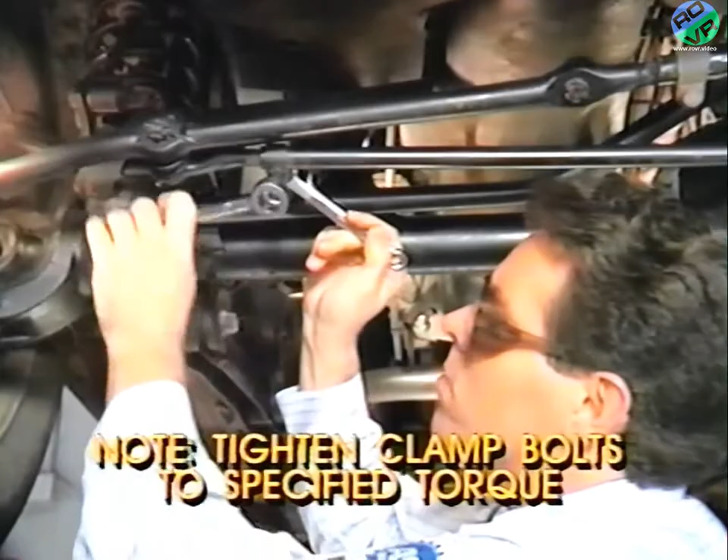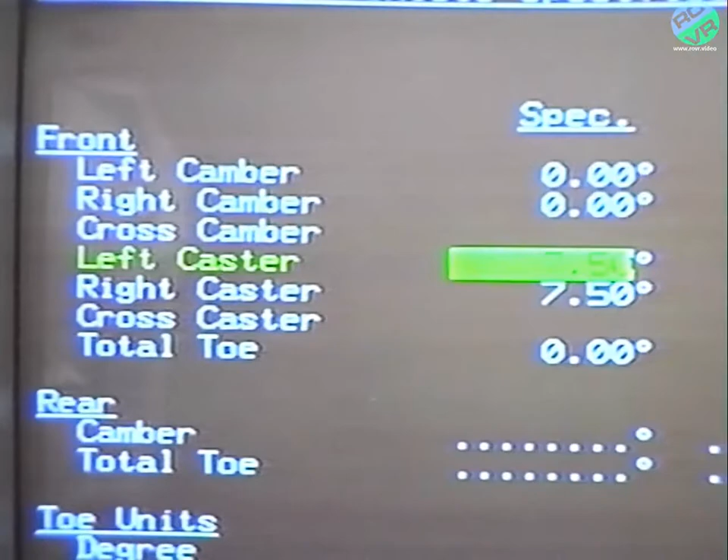On Jeep MJ, XJ, and YJ vehicles, the acceptable and preferred amounts of caster are large in comparison to that found on most vehicles. So, when checking caster on these vehicles, make sure your alignment equipment is capable of reading large caster angles. In this month's Videotech Kit, you'll find charts detailing suspension types and adjustable angles on Jeep Eagle vehicles.

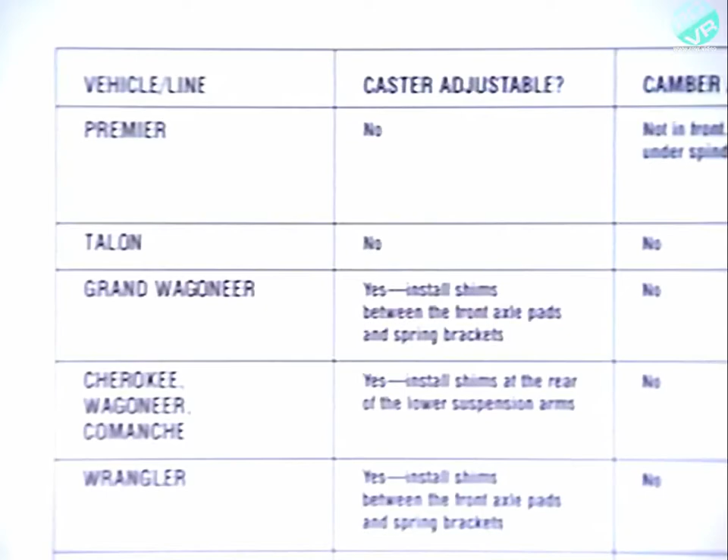As we've seen, suspension service is more than balancing tires and wheels and adjusting alignment angles to specs. A professional approach requires a basic understanding of suspension design and a familiarity with the many factors that affect vehicle ride and handling. That does it for this month's program.